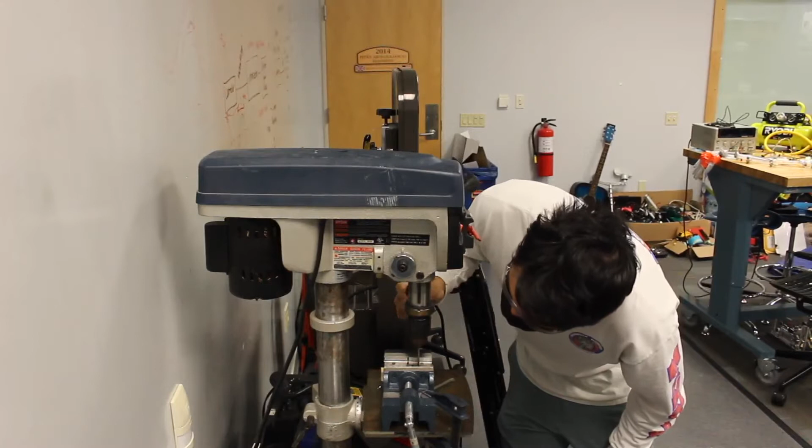And then we also recruited a small fabrication team for manufacturing work, who we were able to give manufacturing access to. The extra time also allowed us to further refine our mount and frame design to ensure that all components followed system requirements and that the overall design was as hydrodynamically efficient as possible.

So, as a system overview, with our new AUV design that you can see here, our goal was to reduce drag, improve maneuverability in the water, and create a custom frame for our new sensors and thrusters. But, of course, due to the limitations that the pandemic created, we also made sure to design the parts to require minimal to no complex machining to make things a little easier for us, while prioritizing the use of machines we had access to, which included a bandsaw, drill press, a CNC router, and a 3D printer.

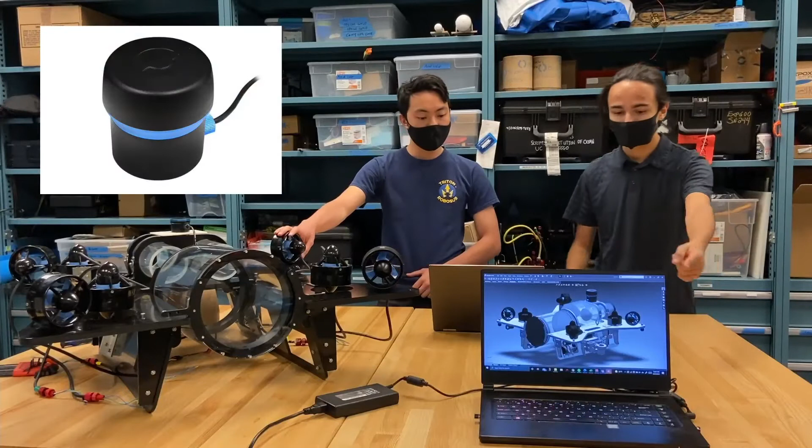Yeah, so the components we currently have are 8 T200 thrusters, a Teledyne DVL, which is not shown right now, and a Blue Robotics Ping360 sonar system. Right now we have the Ping altimeter installed, but this will be replaced soon with the Ping360. 4 hydrophones, which are not installed right now, 2 batteries, which will go in these 2 containers right here, and 1 electronics container. The electronics are pending manufacturing.

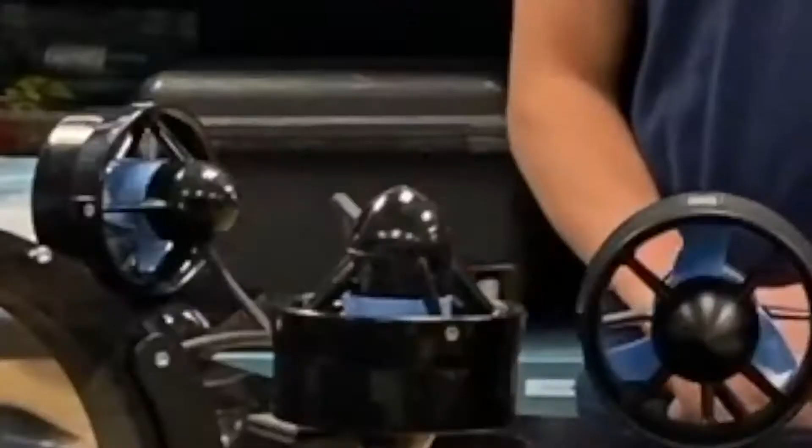For our thrusters, we actually placed the 4 horizontal thrusters that you can see here on the corners in a vector formation, and the 4 vertical thrusters near the corners of the AUV here, which altogether allows for 6 degrees of freedom of motion when moving through the water, which helps us to avoid any component obstruction with how it's placed.

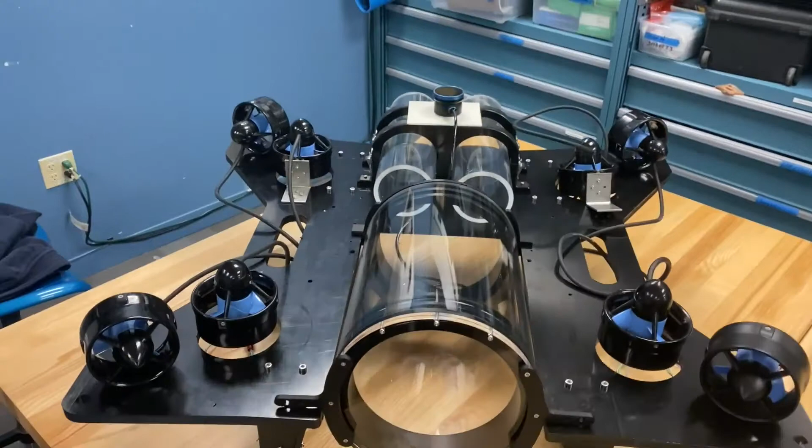Yeah, so the Doppler velocity log allows us to track movement and therefore location of our AUV. Therefore, it's one of our most important sensors. As such, the sensor needs to have a direct line of sight with the ground, and it must remain still while it's in the mount. Otherwise, any movement can mess with its tracking. Because of these requirements, we designed a mount that's attached to the bottom of the frame, which will go right here, where that gap is between the legs, clear of any other components, and that would prevent any rotation or sliding as the AUV moves through the water.

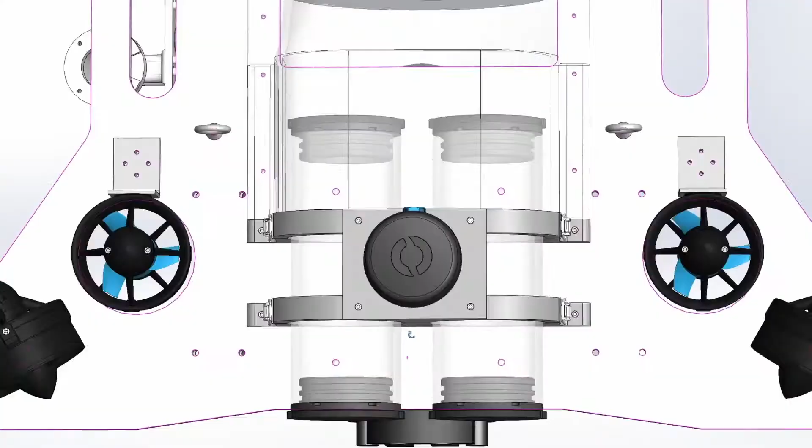The Ping360, which isn't on the current sub right now, but you can actually see in the CAD image below, is used to locate any obstacles around the AUV that the front camera cannot detect and then accurately determine their distance from the sub. This specifically is most helpful when dealing with the competition's torpedo obstacle, with the distance. And since it requires not to be obstructed by any components, it was determined that the top of the sub was the best location for it.

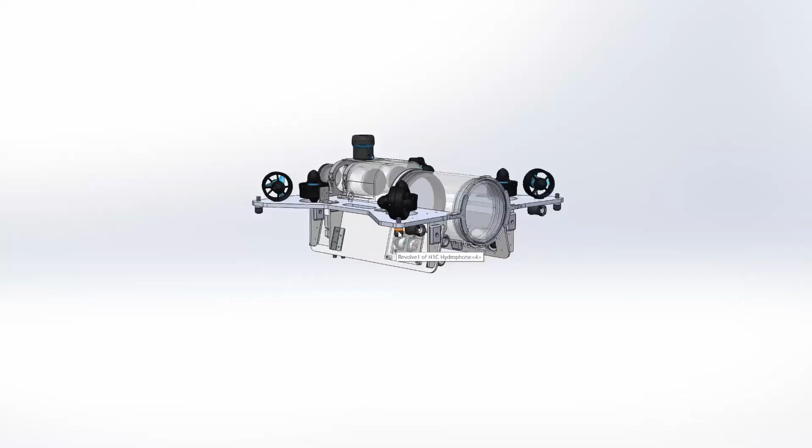So the hydrophones, which will go in these 4 holes in the corners, will allow us to detect specific frequencies of sound underwater. And these sensors are very helpful for us to locate the pingers that are used in the competition. As these sensors need to be clear of any components in order to detect the sound waves, they are mounted at the very edges of the frame. And also, the thrusters and the hydrophones will be set to different frequencies, so the thrusters should not affect the detection of the pingers through the hydrophones.

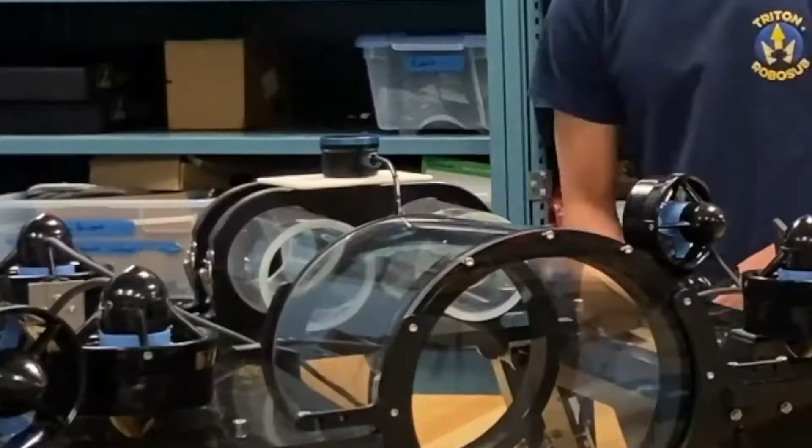So we decided to improve based on our previous AUV by allowing for the attachment of 2 batteries to the sub in order to extend the battery life of the system as a whole. You can see we have 2 battery containers in the back. This basically helps us for testing and the competition by allowing for the AUV to perform more trials before the batteries need to be either swapped or recharged.

The containers for these batteries were placed close to the electronics container, in the rear, allowing for easy access and connections between the containers. Yes, so the electronics container in the front here houses all the boards and 2 cameras that we'll be using. As this component produces the greatest amount of buoyant force, we mount it at the very top to prevent any unintentional rotation of the AUV. And we gave it the front and unobstructed view so that the cameras can identify all of the obstacles.

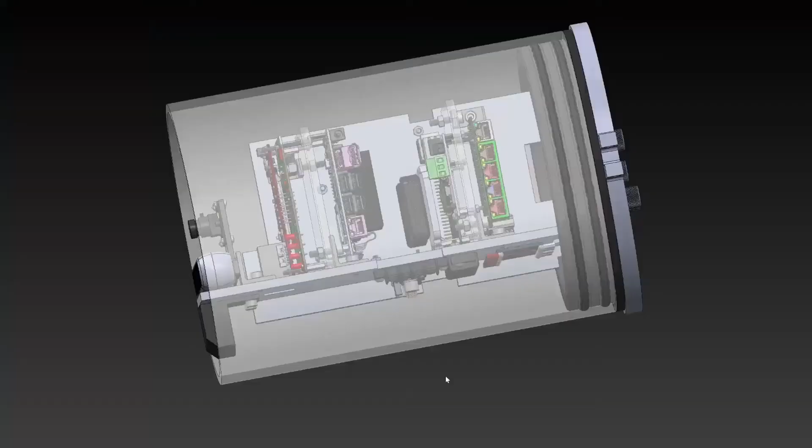The mounting system allows us to remove the front end cap, right here, the front flange, and the front tube without having to remove the electronics tray, which will be going inside here, which means that we can effectively remove this whole container and have the electronics tray stay here for easy access so the electrical team can easily fix any issues that may arise, any loose wires, or upgrade components without having to fully detach it and undo all of our penetrator cables.

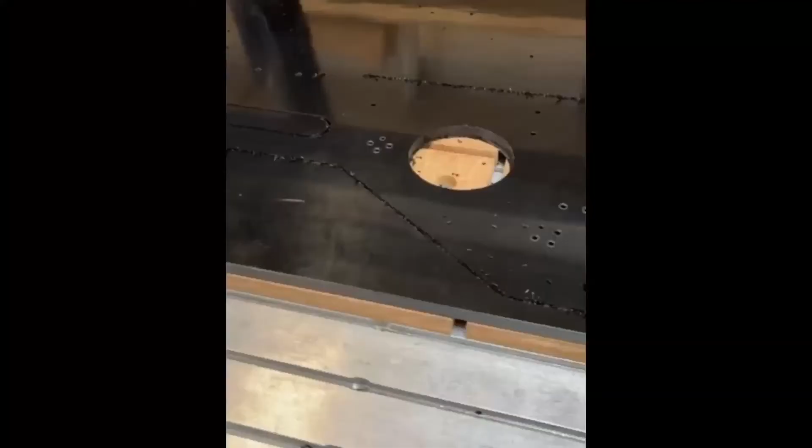Now, to accommodate all the components, we decided to go for a flat plate frame design. This would basically allow for simple allocation of all the components while also keeping a center of mass and buoyancy in the center of the AUV. The frame was originally designed to be made from aluminum. However, for manufacturing ease during the pandemic, and as a first iteration design, we decided to go for a high-density polyethylene material for this first iteration, which is cost-efficient while also maintaining the required stiffness and strength to hold up all the components while moving.

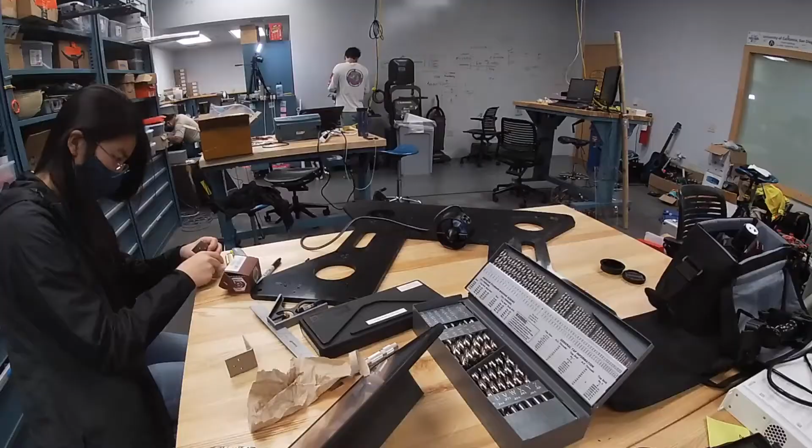Yeah, so the manufacturing process for these components and the frame was originally planned to be done by the entire team. However, that definitely could not be possible due to COVID-19. So because of lab restrictions, we're only allowed to have 4 people in here at once. So in order to accommodate for this, I decided to recruit 3 individuals who have had previous manufacturing experience. These fabricators, as they are called, are purely focused on manufacturing of the designs which are created by the designers.

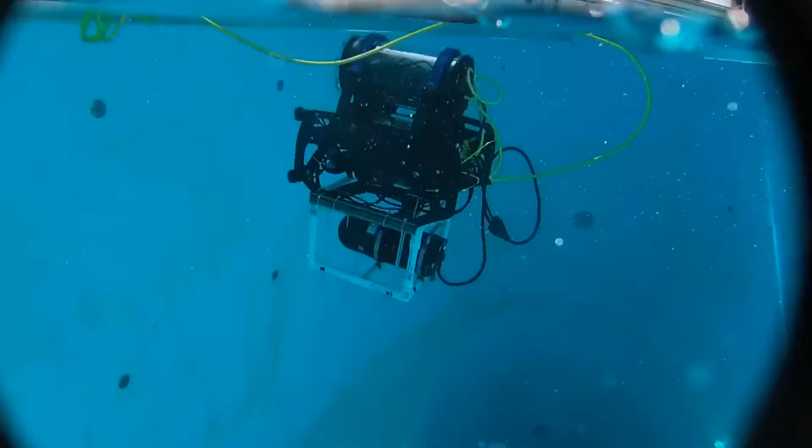For development testing, we began by testing prototypes for a DVL mount that would be attached to the bottom of the AUV. We also made sure to test our thrusters, in order to make sure they were functioning properly, that no water flowed through the cables while in use, things like that. These tests were done using a previous AUV in order to prepare all those components for the new design, which you can see here.

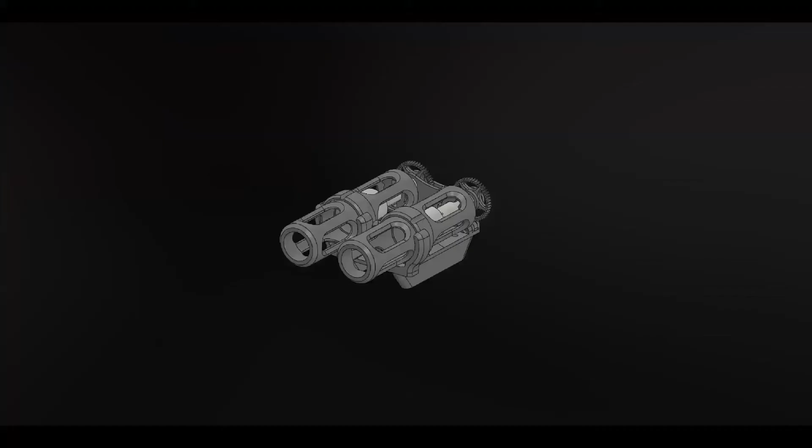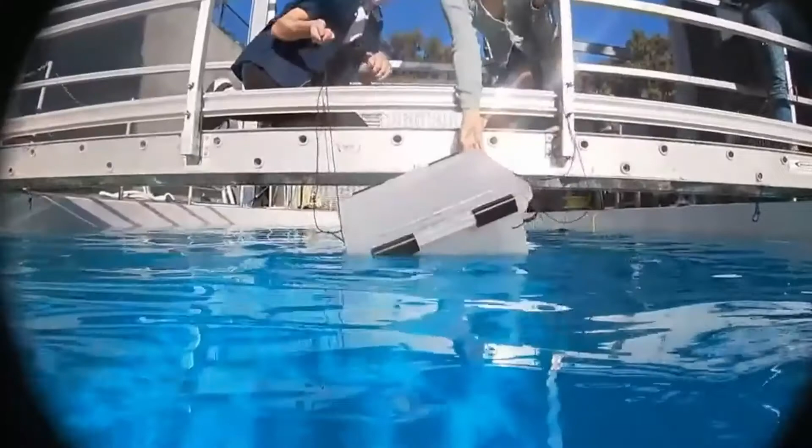So even though we did not completely finish the grabber and torpedo systems this year, we did get to the point where we were able to test the custom waterproof motors for each system. Each motor was lowered into the pool at a depth of 30 feet and left there for 30 minutes. We performed this test with and without the motors running in both a static and dynamic test, and we found that they passed both tests and functioned at 30 feet for 30 minutes.

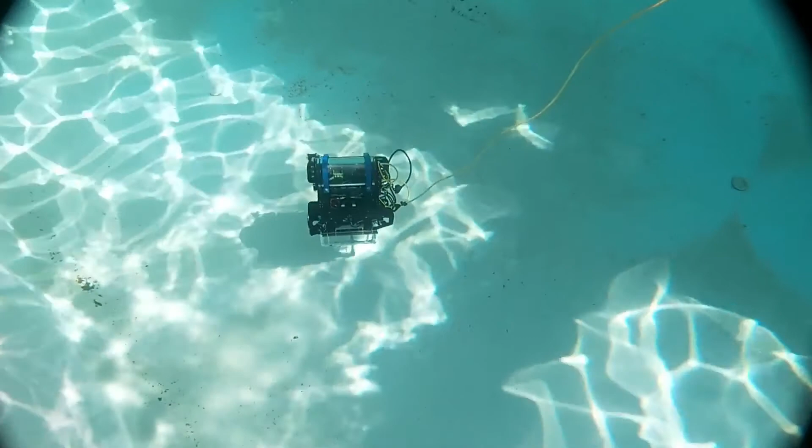In order to test the waterproofing of our containers, we developed a vacuum pump testing system based off of the Blue Robotics hand pump. The system we developed uses an electric pump capable of removing about 3 cubic feet of air per minute, which was connected via tubing to a pressure gauge and a connector that could be attached to a container when necessary. These connectors can be modified to connect to all 3 containers at the same time, which allows for much easier testing of the containers. This allows us to easily test the waterproofing without having to plunge the whole system into a pool, risking potential damage to the electronics.

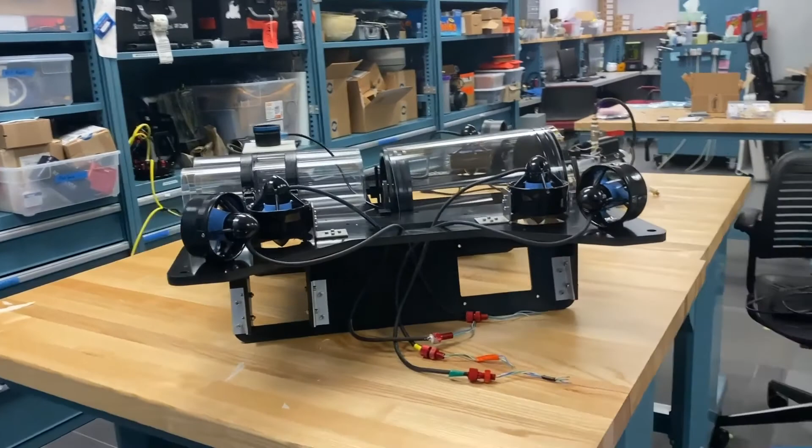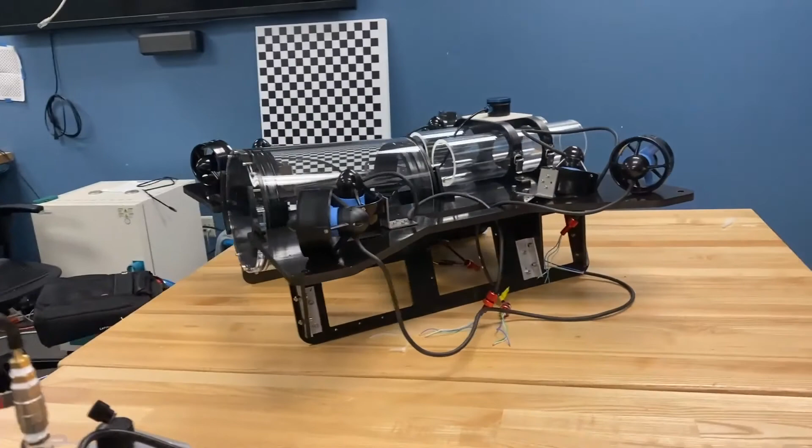When testing the containers, our requirements were that the pressure inside needed to stay at a stable 15 inches of mercury for about 10 minutes. And if that stays good, then it's safe to place the sub into the water.